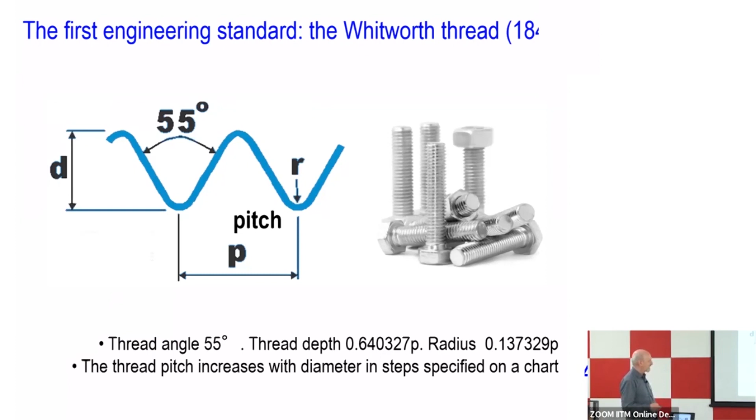So just to refresh your memory from the first day, we discussed that standardization is one of the key pillars of contemporary engineering, and therefore any attempt to make biology amenable to engineering has to go through the process of standardization of some of the tools and some of the methods and some of the things that I will mention along today.

Okay, so what a standard means, and I'm going to spend some time discussing with you what is a standard. So a standard originally means a banner, like you go with a banner and then the others follow you, and that's a standard. So in a battle, everyone, or in the past at least, everyone will look at the banner, whether it's there, whether it's not there, and that will orientate the different actions.

So that's why the term standards comes from the military world, but then also the meaning of it is all standing for the same. And therefore, keep in mind that the notion of a standard also embodies a degree of leadership, okay? So if I propose a standard and everyone follows me, that means that I am in a position of leadership. If the French Revolution proposed the metre as the standard for a distance, then that means that they had a kind of leadership in the field.

And so keep in mind these two aspects. One of them is a standard is something that everyone recognizes as significant, and also a standard means that the one that holds the banner has a degree of leadership.

So what is a standard in engineering? So there are some features of standards. First of all, a standard is about the words, semantic and graphic language for annotating the nature and the properties of a system. Okay, so when we use logic gates and we use the triangles or the little bubbles or whatever, that's a standard.

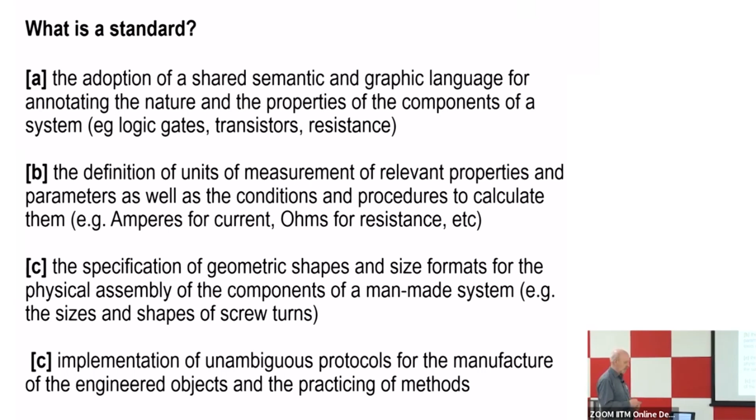So this is in general what a standard is about. So what are standards good for? And again, we are still in the realm of engineering.

Well, a standard, first of all, enables the abstraction of the properties of the component of a system. If we say I have 5 amperes, you don't talk about the electrons, you don't think about the kind of material that the electrons go back, you just have that idea of amperes.

They also enable a precise description of something in a standardized quantitative language. If I say the measure here is, I don't know, 70 centimeters, you know exactly what I'm talking about.

And also, because of this graphical aspect of standards, you can represent the composition of an object with identical representation methods, okay? So if I make a logic circuit and I send it to China or to Singapore, it doesn't matter, they will understand exactly what is the content of that particular blueprint.

And as I also mentioned in passing the first day, a big bonus of standards is that you can disengage the design of a product from the fabrication, from the final assembly for the distribution. So this is something that is inherent to the value of standards.

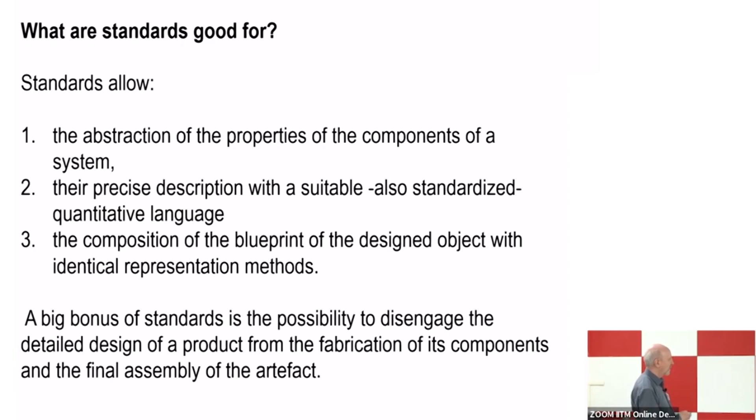So what things can be standardized? Okay, there are some things that can be standardized in engineering, and as you will see immediately, some of these things that can be standardized have an instant kind of projection in the biological world.

So for instance, you can standardize the physical assembly of the components of a system, and about geometrical shapes, dimensions, boundaries between elements, compositional rules. This is something that can be standardized.

Also, you can standardize the metrology, the way you measure things. You use a given technology to measure relevant properties, to calculate units, to give reference values, to examine tolerance and other ones. This is something important that I will return to in a moment. It allows you also to measure or to consider context sensitivity, transfer functions.

You can also standardize the manufacture of engineered objects. There is an international organization called ISO, the International Standards Organization, that gives a stamp so that industries can follow given procedures to produce given things. So you say, well, this object has been produced following standard ISO 300-475. That is a very established procedure that can then be reproduced by many others.

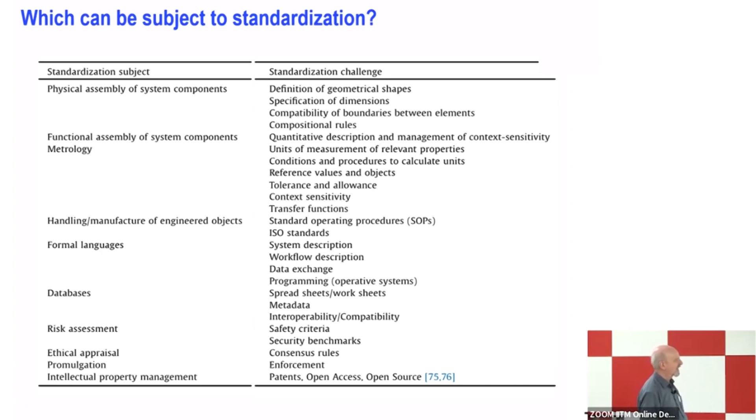So this tension between standards that go from the community upward, and standards that are imposed by brute force, is something that happens also in some cases in synthetic biology, as you will see later.

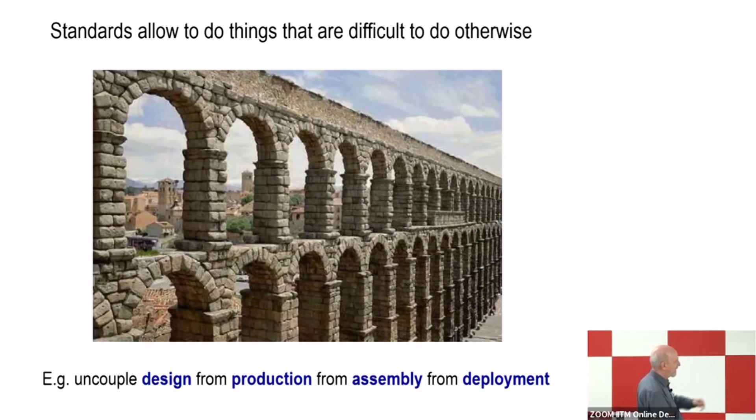I showed you this slide before - this is an early example of civil engineering, an aqueduct in a city close to Madrid, in my country, Spain. You can see every block here follows a size, angles, periodicity, and so on. Thanks to that, it was possible for the Roman architect to design the thing, produce the stone somewhere else, assemble it somewhere else, and then deploy it somewhere else as well.

As a consequence of that, and this is something I mentioned in passing the first day, you have to reshape the way you look at biological systems from the perspective of synthetic biology. In biological systems, the frame that enables us to understand what is going on in living objects is the so-called central dogma of molecular biology, where you have DNA, RNA, proteins, and metabolism, with a flow of information all the way from DNA to proteins and eventually to metabolism.

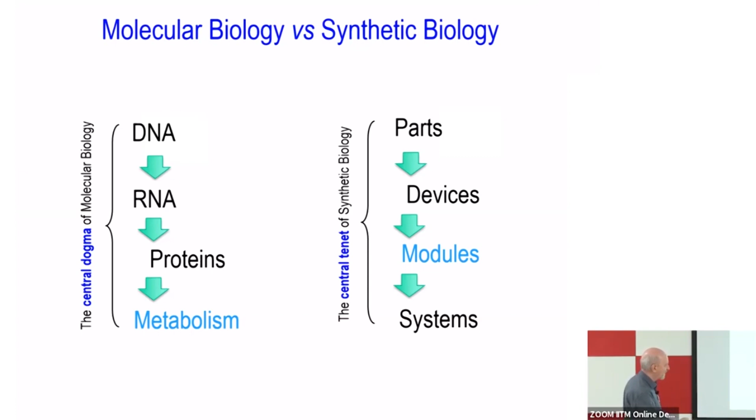Well, in synthetic biology, it's good that you keep that in mind, but this is not very useful. What is really useful in synthetic biology is that parts, biological parts, once they are composed, form devices. Once the devices form, they can be assembled to form modules, and eventually modules can form systems. So this is a different perspective of the same thing.

Now, where do we put the devices to have them working in a given biological system? Basically you have two choices. One is assembling the devices in a plasmid, and we will discuss later how that works and what are the pluses and minuses.

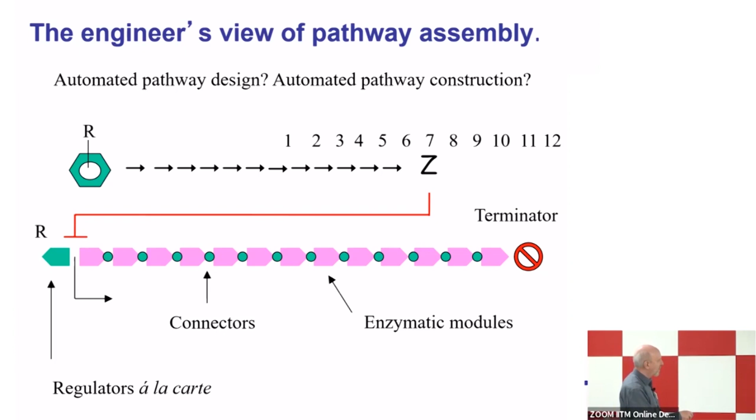Okay, so this would be the ideal situation, right? You say, well, to go from this to here, I go to the literature and I need all these enzymes. I go to the genes, I clone them, I put them in front of a strong promoter, and bingo, it should work. Okay, well, this is in many cases what we kind of tell the world, but ladies and gentlemen, things are not so easy, right? So in many cases, we think that we are doing fantastic, but we are not doing fantastic, okay? We have to be careful about that.

Okay, why are we not doing very well? Well, mostly because of these 4 reasons. Number 1, biological components are context dependent. I just mentioned that. Also, don't forget that we are talking about biological systems that are alive, and therefore they are subject to Darwinian evolution, okay? So that means that they can mutate, and the mutants in some cases can be more successful than the constructs that we make on purpose.

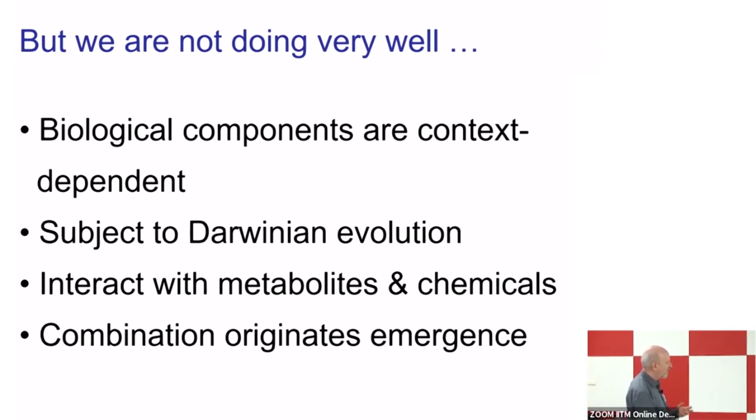But also, everything that we construct in a living system interacts constantly with metabolites and chemicals. So if we produce a protein, the protein does not appear out of the blue. It's all surrounded by a big concentration of other molecules, other chemicals, and other things. And what is more worrying is that in biology, combination originates emergence. So it's not just that we have context dependency that may vary the input-output functions a little bit, it's that sometimes when we combine biological components, the outcome may be completely unexpected. So it's not that one thing is a little more, a little less. So this is a serious problem, a fascinating problem that goes as follows.

In mathematics, 2 and 2 is 4, okay? No discussion about that. In engineering, things are not so, because 2 and 2, this is very difficult. When you, for instance, make a screw turn, you have a dimension of the receiving part exactly the same as the other one. And if you had exactly the same dimension, it would not work. I mean, you need to have some little space between the two to make them fit. This is something I will return to in a moment. It's connected to the allowance of standards, but you know, in engineering, things are close to mathematics, but they're not mathematics.

But in biology, 2 plus 2 may be 4, but then you have this phenomenon that is emergence. Emergence is that you don't know what's going to happen. You cannot predict what's going to happen when you put these 2 plus 2 together. So sometimes you combine one gene and another gene, and you think that something is going to happen, and then what happens is something completely different.

You put this enzyme and this other enzyme, and you predict that the result of these 2 steps will be one specific reaction, and then what happens is that maybe the first enzyme will kill or inactivate the other. In other cases, it will activate the reaction, and in other cases it will originate a completely novel reaction that has nothing to do with the ingredients. So this is emergence, okay?

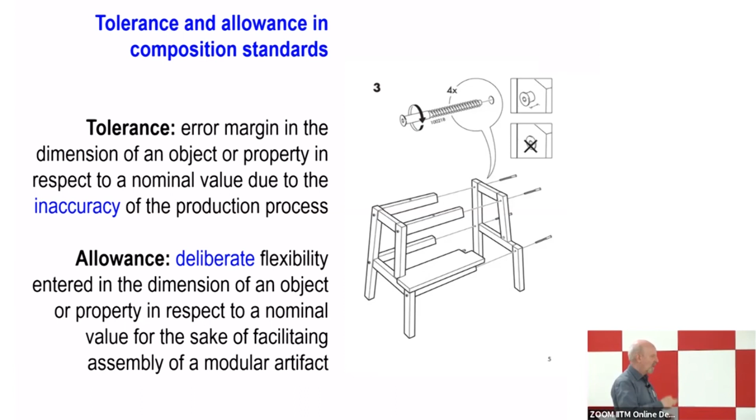So allowance is a deliberate flexibility that you enter in the dimension of an object to make sure that the 2 things fit together, okay? So when you have a screw component, and you have the receiving hole of the screw, if the 2 were absolutely identical, the system would not work. You have to leave a little room for the 2 things to go one after the other, okay? So this is something that the engineers have known for a long time.

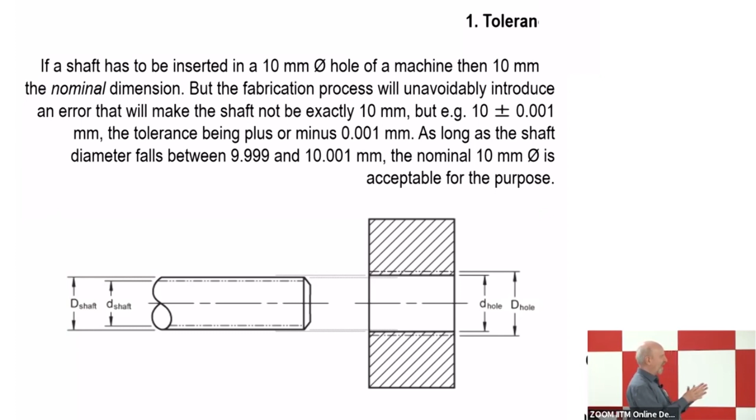And the thing is that, for instance, if a shaft had to be inserted in a machine and 10 millimeters is the nominal dimension, number one, there will be some error, and therefore the system has to be thought to tolerate the kind of error margins that are associated to the production process. And then, by the same token, and I don't want to go in detail through this text, in many cases, to make the system work, you have to allow some margin, not of error, of room for the 2 things fitting together, okay?

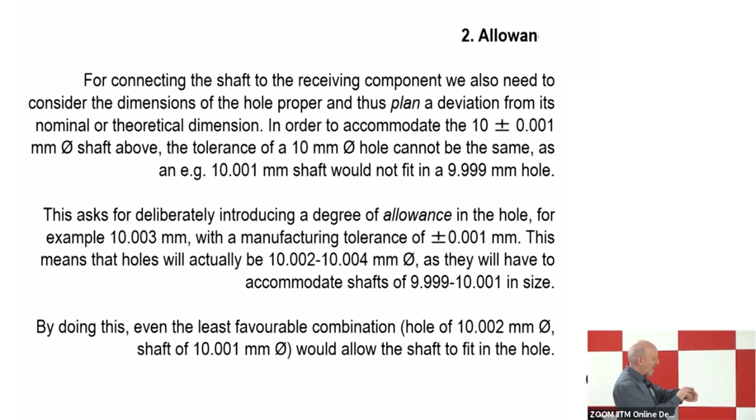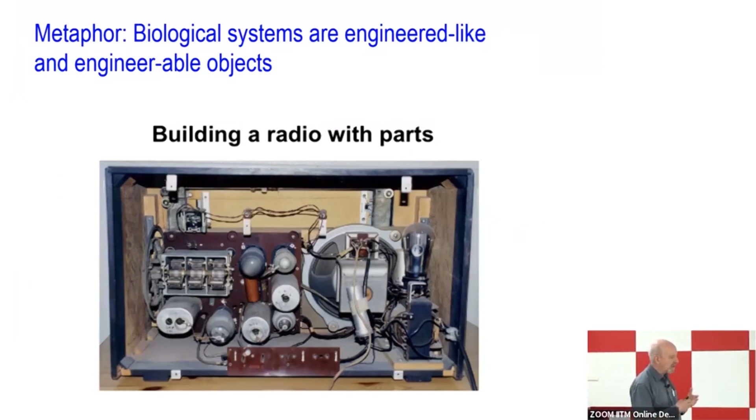Okay, this is for mechanical engineering, for electric engineering, and for the kind of engineering that we know on a daily basis. How can we translate this to the biological world? Because obviously, if we're talking about standards, we have to consider all these circumstances. Okay, so let's recover again this metaphor of the radio built with parts and see how far we can project these ideas about engineering standards to the biological world.

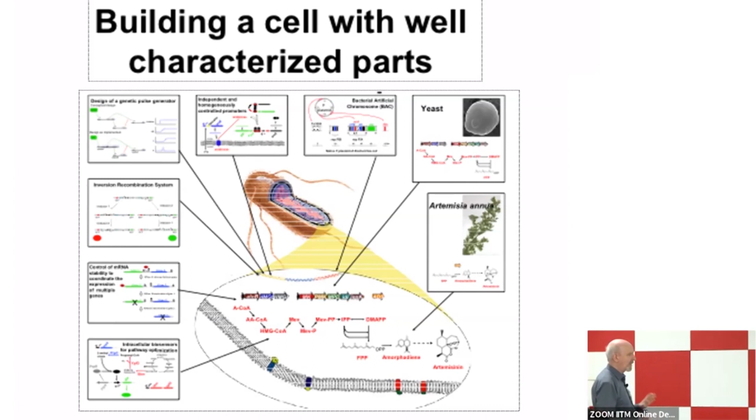This slide that I also showed the first day indicates that the radio has many components, many parts, and also cells from the perspective of synthetic biology can be understood as a bunch of structured, well-organized and well-characterized parts, okay? So in this case, the parts are transistors, cables, connections, bulbs, and then you have this speaker. Then in the case of a cell, you have genes, I'm sorry that the resolution is not good, but you have different types of molecules, you have controlling elements, and the list is very long, but it's still limited, it's not infinite.

Okay, so we return to the star concept in synthetic biology, that is the concept of parts. So what is a part? A part is a DNA sequence that encodes one non-equivocal biological function. It has to be one. It cannot be 20. It has to be one. But from the perspective of synthetic biology, this is not enough. So the part has to be endowed with additional properties.

Number one, the part has to be composable. That means that the part has to be designed to make it amenable to further composition with other parts, with other segments of DNA. It has to be reusable. Reusable means that the part is good not for one specific purpose, but one day I use it for making this construct, then I take the part some other day to make another, and another, and another.

I can reuse the same part for various purposes. If I have a promoter, then I can use that promoter part for expressing, I don't know, beta-lactamase, but tomorrow I want to express a pathway for degradation of xylene, and then I can use the same promoter, and the other day I want to do it for expression of genes that deliver at the end some synthetic material. Okay, so it's the same part, and we use it in different contexts.

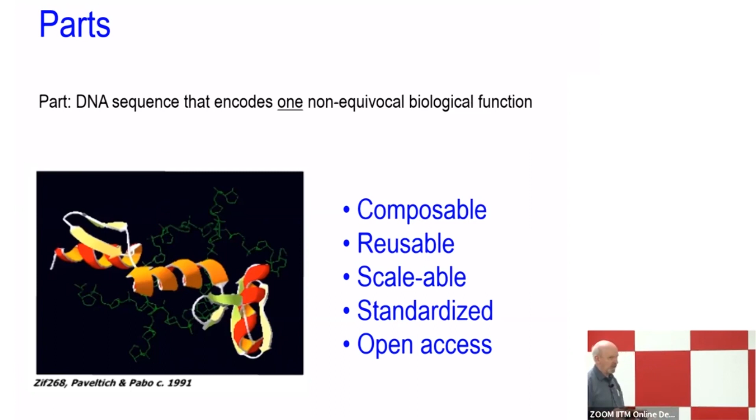Then it's scalable. Scalable means that you can use it in many different places. It has to be standardized, and I will return to that. And also, and this is important, it has to be open access, okay? Well, this is not obligatory. I wish it were obligatory, but it's not. But in general, the community of synthetic biologists advocate, including myself, that biological parts that are standardized should be made available to everyone without the limitations of intellectual property, patents, and all the rest of it.

So what is in a part, okay? In a part, you have basically three contents. First, the DNA sequence, of course. If you don't have a DNA sequence, you don't have a part. Then the function associated to the DNA sequence, and also the activity figure. And the activity figure is a very important characteristic of a biological part, because if not, you are not in synthetic biology, you are before synthetic biology. So you need to have a sequence, a function, an activity figure.

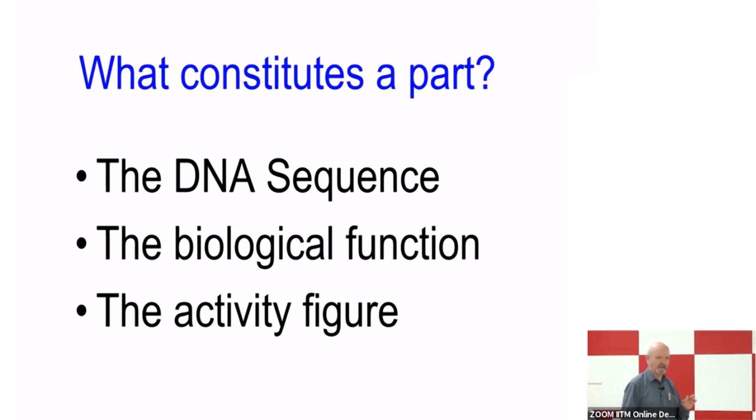For instance, I have this sequence of DNA. The biological function is a promoter, and the activity of this promoter is 40 PoPS. That's a super wonderful part. It's super well characterized, okay? So I'll show you how these parts can be abstracted and how far you can get with this type of definitions. And also, as is the case with electronic components, you can give them a code. So you have a list of parts that are encoded, not with the whole sequence, but just with a name that again is standardized and enables you to handle them very easily.

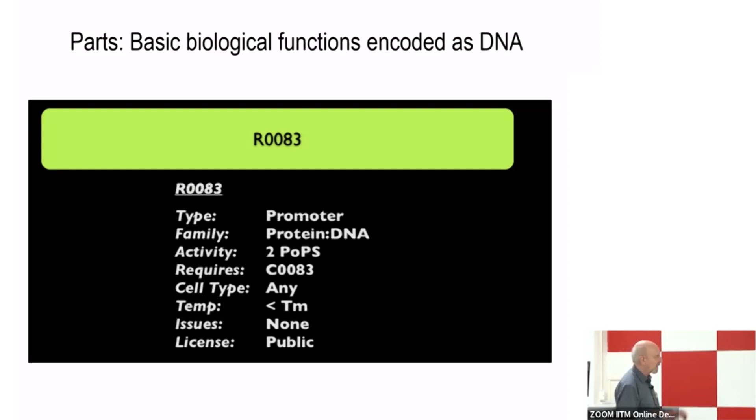So this would be the perfectly defined part. You have a sequence of DNA. The function is a promoter. The family it belongs to is the DNA interacting proteins. The activity is 2 PoPS. Then it requires this other part to be assembled; probably this part is a plasmid or something. Cell type, any, that means that it can go in any biological system. Temperature appears to say that this goes lower than melting temperature. Issues known: in principle, no one has found any problem with it. And then public, that means that everyone can use it, okay? So this is just one part. There are tens of thousands of parts that are characterized under this kind of nomenclature.

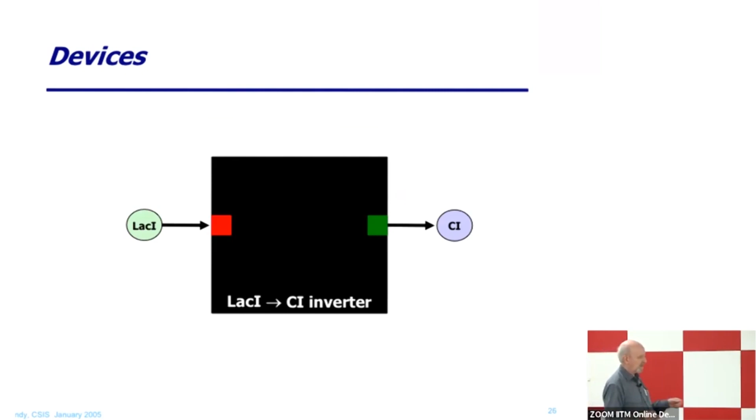Well, there are various initiatives, and there have been indeed, mostly in the US, this idea of collecting thousands and thousands of parts and characterizing them in terms of inputs and outputs. I mean, this obviously for a human is impossible. It will be very boring to spend all your time making this type of characterization.

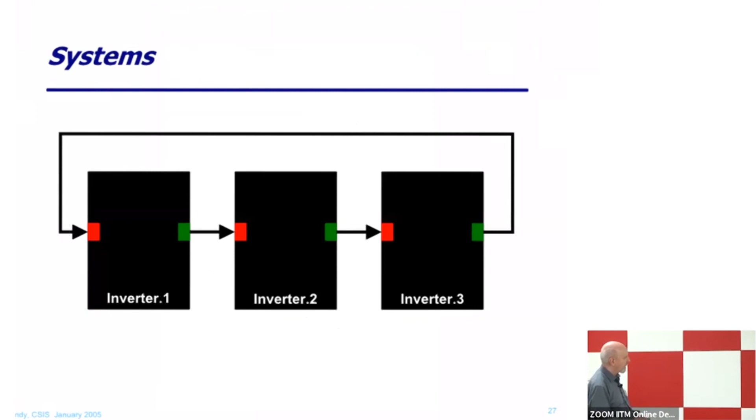But many of these operations to define the input and output values of a given device now can be run by a robot, in such a way that at the end, for every part, and there are thousands of parts, you can have a kind of information page where you can really monitor and visualize all the characteristics and all the parameters associated to that part. And then with these characteristics and these parameters in hand, you can go on and make devices and the rest of it.

Okay, so what I have told you so far is connected with the standardization of parts. But there are other aspects of synthetic biology that also deserve and have been standardized. One of them is the language. And the main language for describing synthetic biology constructs is the so-called SBOL. SBOL means Synthetic Biology Open Language, and is a language that has different degrees of depth, and is very useful because it enables you to describe genetic constructs with a language that can be understood not only by humans, but also by machines, by computers. So that's something that is very useful.

And the SBOL language is becoming more and more used by the community to have an accurate description of different procedures and different parameters associated to a given biological construct. So instead of having this soft wording of some biological phenomena and some biological properties, with SBOL we have a very precise description of what is going on.

Not only that, but there are some initiatives in the last few years to convert the SBOL language into a language that can be fed to a robot to run experiments itself. So instead of having to do the experiments ourselves, we code the experiment in this language, and then a robot can really run the operation without any human intervention.

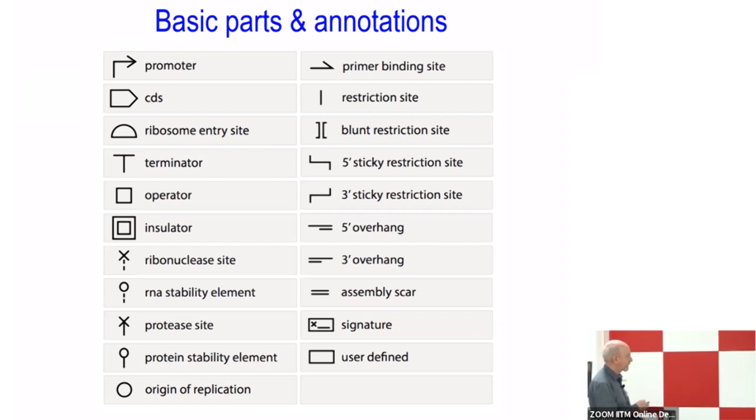No, please always use standard annotations for graphical representation of your constructs, because that enables you to communicate the contents of your constructs to a much wider community that will not be confused by some whimsical symbols. Okay, so the next screw turn is that we have defined the parts.

We see that the parts have to be standardized, that there are some kind of characteristics and so on. But then where do we find the parts? Basically, parts can be made by any laboratory and you can have them, etc. But there is a major repository of parts that is found in association to iGEM. I will go to that in a moment.

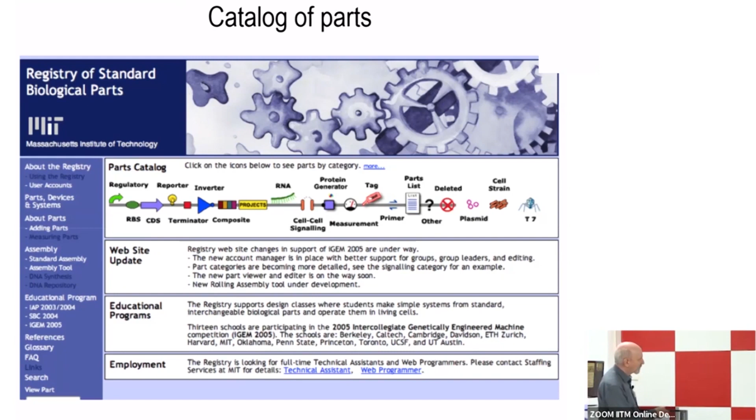But there are catalogs in which you can find different categories of parts standardized in a way that enables their assembly and so on. And the most famous of all of them is this Registry of Standard Biological Parts. You can go in to find out what they have on this page here. At the end, I have a number of web pages, links that you can check. And it's constantly updated.

And what you have there is an immense collection in the order of thousands, tens of thousands of different parts that the community has developed over the years following these rules about having a DNA flanked with restriction sites that enable their composition and so on. And that's something that is very, very useful.

And also, what is interesting is that in this registry, you can get the rules for producing these parts. So that means that if you, in your laboratory, develop another part and you want the part to be considered a synthetic biology part, then you have to follow these rules and eventually add that part to the collection so that everyone can start using it for different purposes.

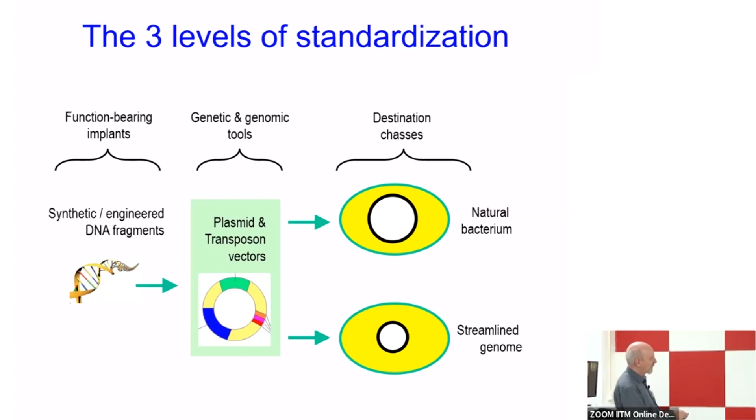And then what you can also standardize, which we had a big discussion about in previous days, is the destination chassis — whether the chassis, the recipient, is a natural bacterium or one that has been reshaped, with the genome remodeled, rewritten, or modified somehow to receive specific vectors that in turn contain specific fragments of DNA engineered for given purposes. That's how things would go in the case of the biochemical standard.

I leave you with this slide, which we will discuss in detail in the second part of the class today. Now we have a five minute little break, and then we go back into this story about the SEVA platform.